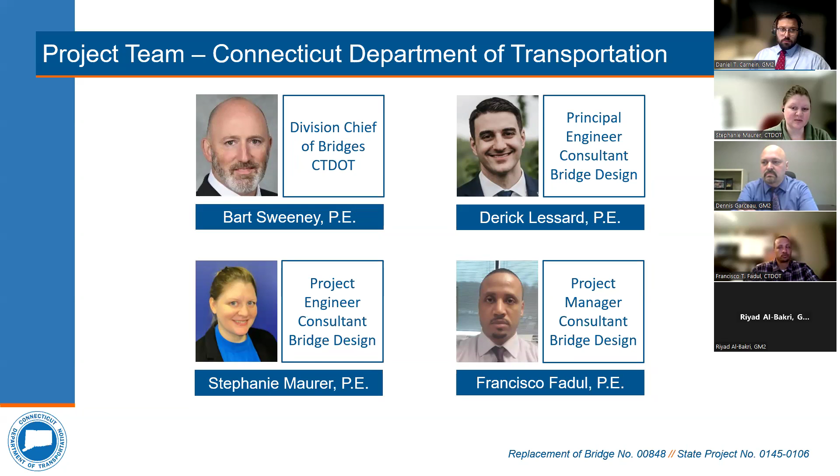All right, thank you, Stephanie. Again, my name is Dennis Garceau. I am the project manager and work for GM2 Associates, who is the Connecticut DOT's consultant liaison engineer. Tonight, as far as the agenda goes, I am going to first perform a formal presentation of the design process. Through that presentation, we'll explain the condition of the existing bridge and describe the project's purpose and need, present the proposed scope of work, and explain the anticipated project benefits and impacts of the project. And at the end of the presentation, we'll open the forum up to your comments and questions.

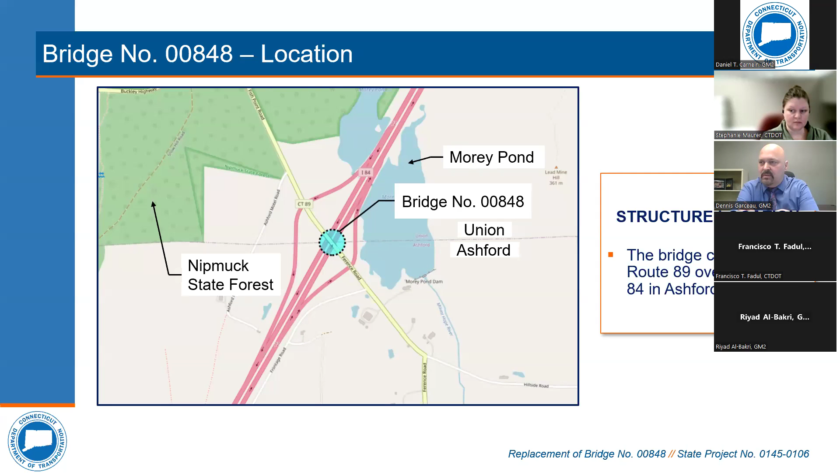This particular slide shows basically a location map showing bridge number 00848 at the center of this map, which carries Route 89 over Interstate 84 in both the towns of Ashford and Union. The bridge is actually sliced in half right at the town line, with Union to the north, Ashford to the south. A couple key features: Nipmuck State Forest is to the west of the project, and Morey Pond Road is in close proximity to the east limits of the project.

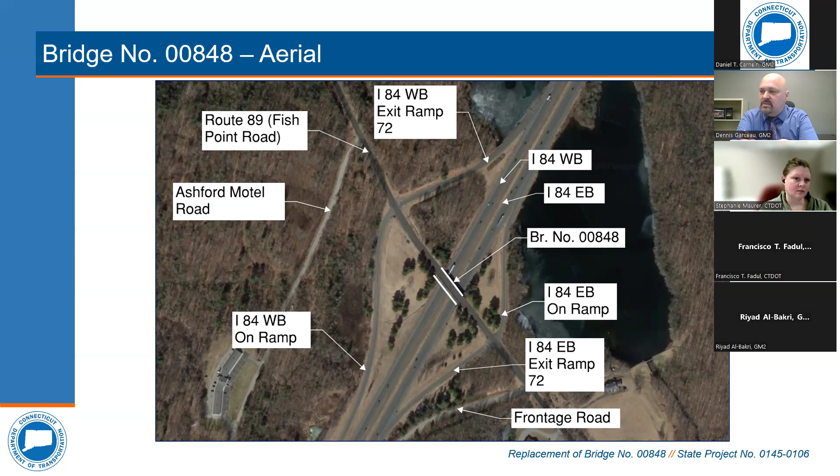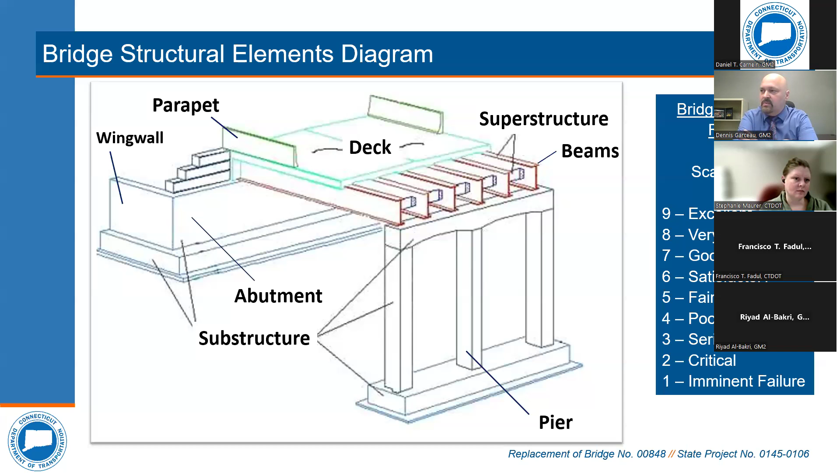A couple of things to note on the slide is that every 2 years, the Connecticut DOT does an inspection of this bridge and all other bridges throughout the state of Connecticut. And they basically prepare a bridge inspection report, which notes the different conditions of each of these components. And it's rated on a scale of 1 to 9, as shown on the right here, 1 as imminent failure, up to 9, which is an excellent condition.

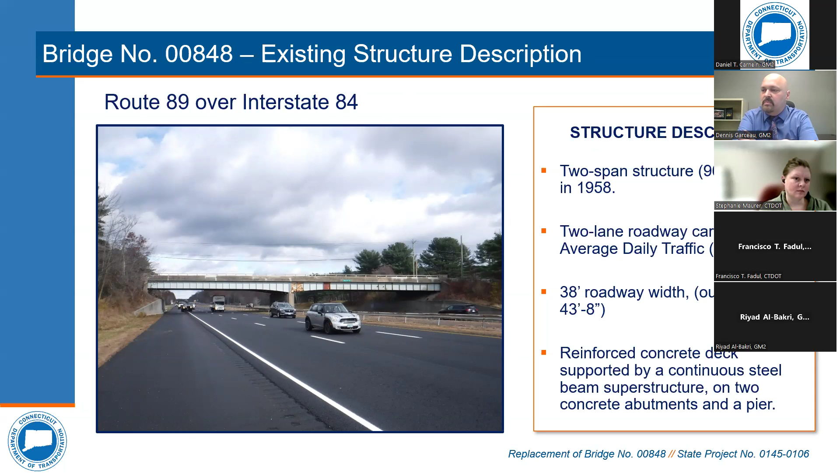Some of the things to talk about as far as the existing structure itself: again, it carries Route 89 over Interstate 84. It's a 2-span structure with 96-foot spans each. It was built originally in 1958. It carries 2 lanes of traffic with approximately 900 vehicles per day based on the year 2020 counts. The existing curb-to-curb bridge roadway width is 38 feet, and the out-to-out width is 43 feet 8 inches. The bridge is comprised of a reinforced concrete deck supported by a continuous steel beam superstructure, supported on 2 concrete abutments and a center pier.

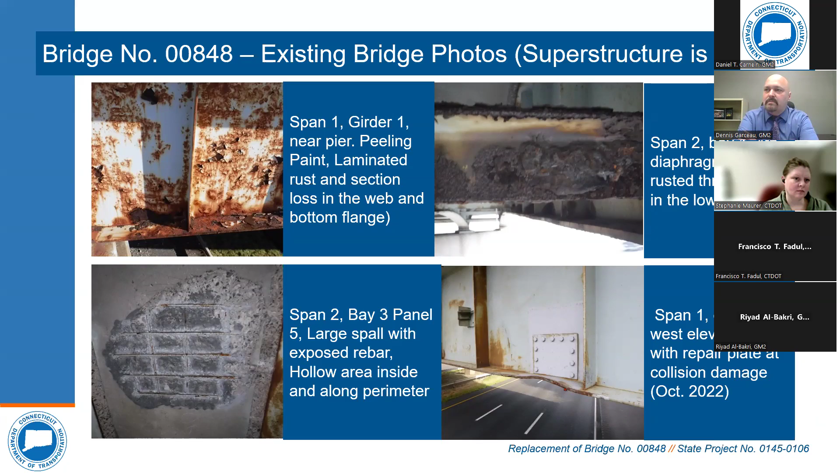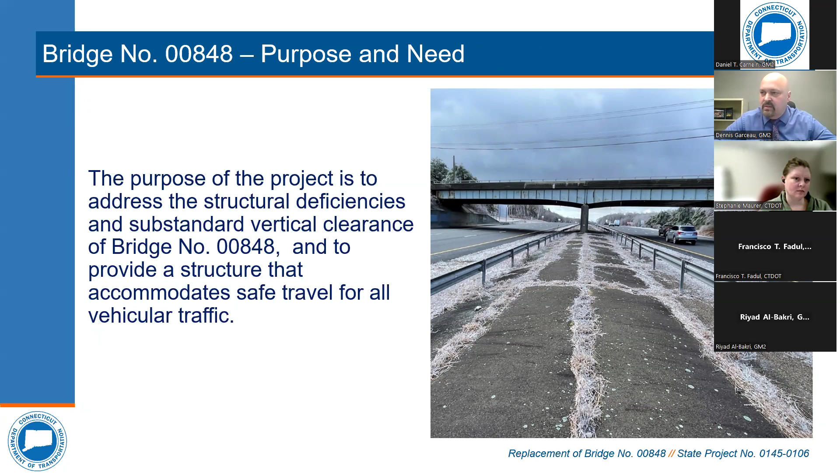The purpose and need of the project is to address the structural deficiencies noted on the previous slide, and also correct the substandard vertical clearance of bridge number 00848, and ultimately to provide a structure that accommodates safe travel for all vehicular traffic, both on and crossing under the bridge.

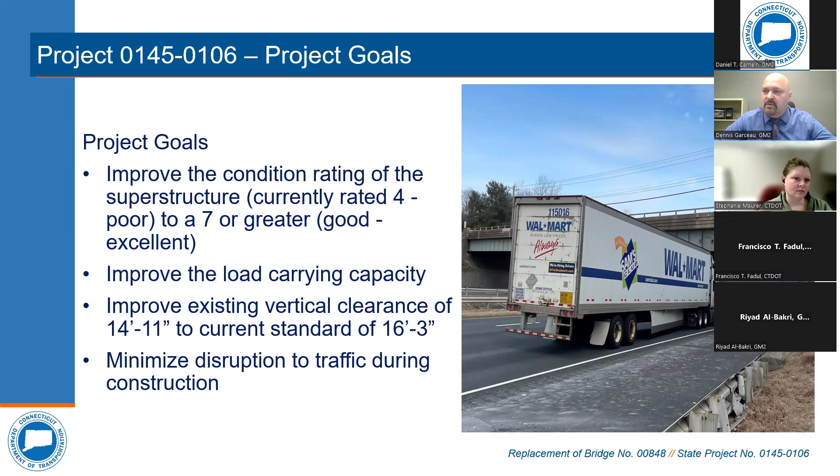Project goals are to improve the condition rating of the superstructure, currently rated a 4, which is poor, to a 7 or greater condition, which is good to excellent. We also want to improve the load carrying capacity of the bridge, and improve the existing vertical clearance of 14 foot 11 to current standards of 16 foot 3 inches. It's also important that during construction we minimize disruption to traffic.

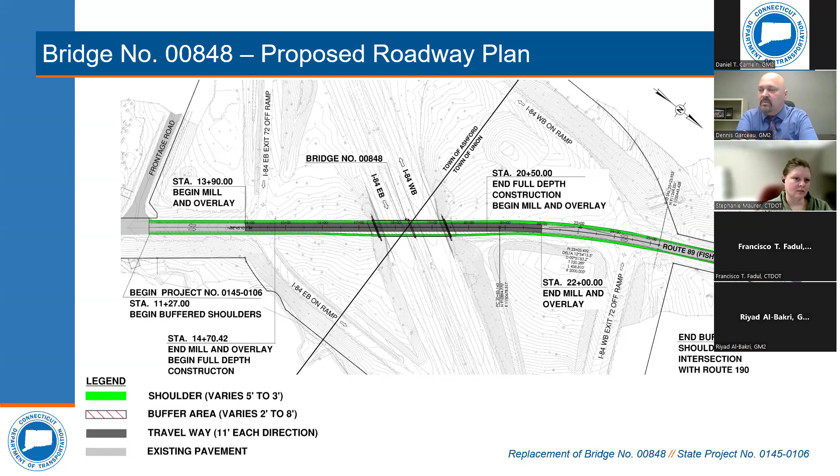The other thing incorporated in this project is the complete streets policy introduced by the department back in August of last year. The intent of that policy is to not only design projects for vehicular traffic, but also to safely accommodate both pedestrian and bicycle traffic. As part of this project, shown in green and in the red hatch areas, we're going to be providing buffered shoulders, which will begin just north of the frontage road on the southerly limit and extend through the project all the way to the intersection with Route 190 on the northerly limit. Next slide.

This slide is showing an aerial view of the overall limits of the new buffered shoulders that will be added, starting just north of Frontage Road, passing through the project area, and then further north past Ashford Motel Road all the way to the intersection of Route 190.

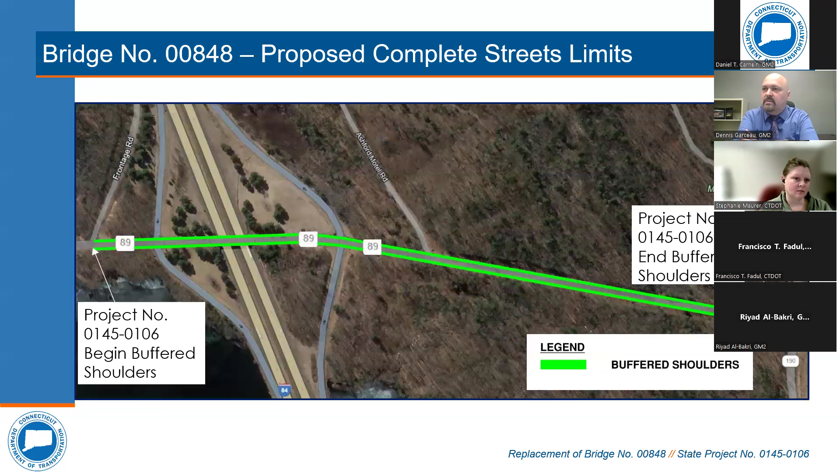This plan is showing a blow-up view of the actual bridge plan. We'll be providing two 11-foot travel lanes, shown in gray. There'll be buffered areas, which will be 2 feet at each approach. On the easterly side, it'll vary from 2 feet to 8 feet across the bridge, and on the westerly side it will be a constant 2-foot buffered area. What's shown in green is the shoulder area, which is approximately 5 feet.

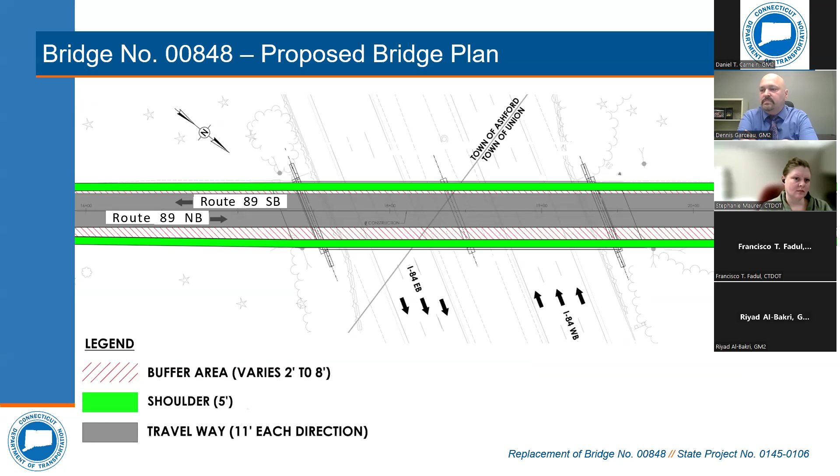This is showing a detail of what it would look like if you're standing down in the median looking west, with eastbound traffic on your left and westbound traffic on your right. The main thing to point out is that the minimum vertical clearance will meet the new standard, which is 16 foot 3 over the full width of both the eastbound and westbound of I-84.

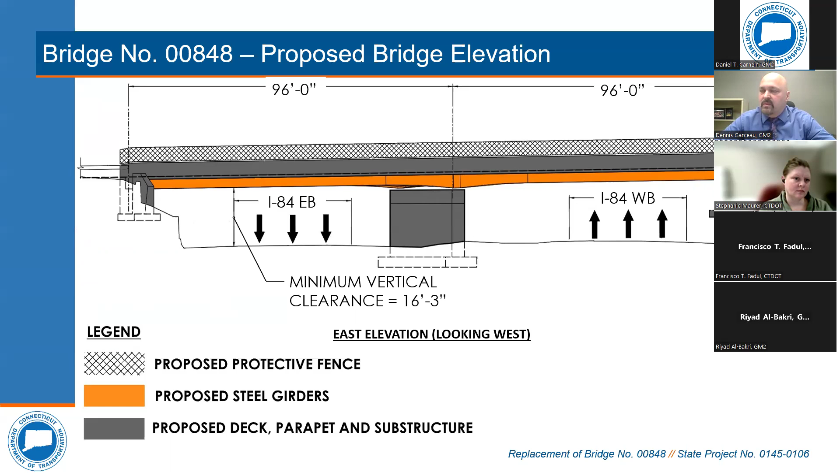Next slide. This is showing a slice through the superstructure, which is comprised of the steel beams and the concrete deck and parapets. The concrete deck and parapets are shown in dark gray, and the beams are shown in orange. The other thing to note is the proposed bituminous overlay, shown in the gray hatched area. Again, the proposed structure will accommodate two 11-foot travel lanes, a 7-foot buffered shoulder on the westerly side of the bridge, and a 13-foot wide buffered shoulder on the easterly side of the bridge.

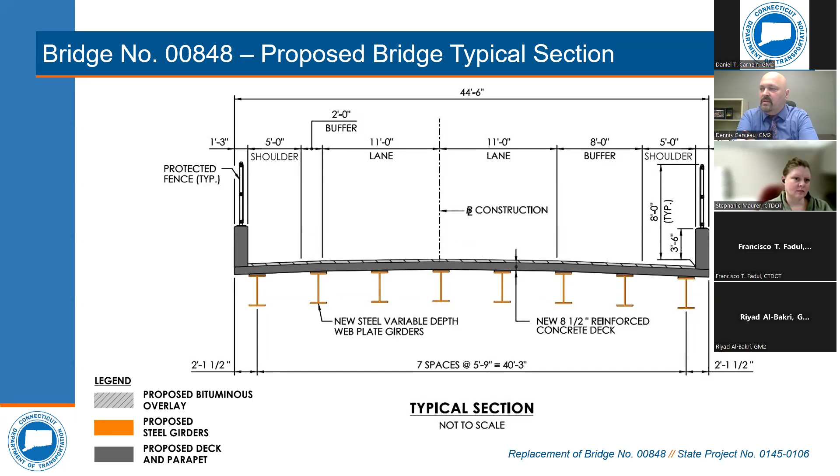During construction, the bridge will be constructed in 2 stages, and one lane of alternating traffic with signal controls will be maintained during construction. Essentially, during the first stage, the westerly half of the bridge will be removed, and then the westerly half of the new bridge will be constructed. Prior to doing that, the traffic will be shifted to maintain one lane of alternating traffic with signal controls on the easterly half of the existing bridge.

And this is basically showing what happens during the second stage. The traffic will then be shifted to the new westerly half that was built, and the contractor will then continue to remove the remaining half of the existing structure and build the second half of the new structure. And in the final condition, we basically get the full width of the new structure, which is 2 11-foot lanes, the 7-foot buffered shoulder on the westerly side, and the 13-foot buffered shoulder on the easterly side.

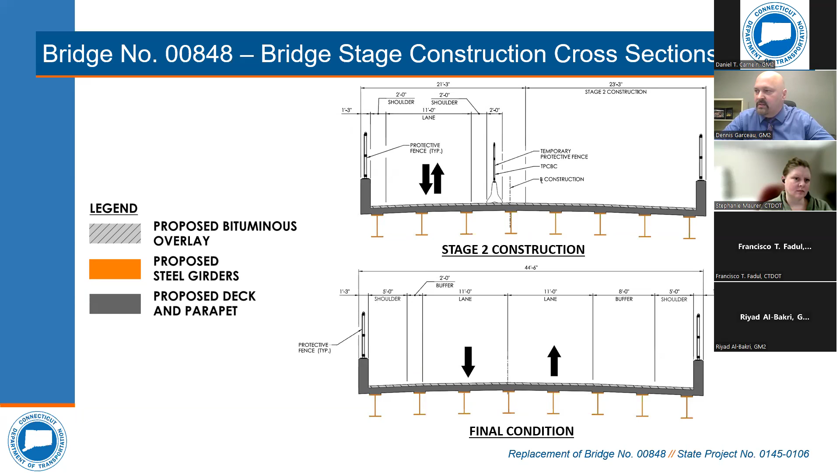Other thing to note is that during construction, there are some construction activities that will require both Route 89 and I-84 to be closed for short durations, which are typically scheduled to occur during the night when there's less traffic volume. To accommodate the traffic being closed on I-84, the traffic will be detoured to the exit and on ramps on both sides of the eastbound and the westbound accordingly, when the traffic needs to be closed for swinging, doing any overhead work with cranes, like the removal of the existing beams and the placement of the new beams.

Also, there'll be short-term closures for Route 89. For traffic that's on the south side of the closed bridge and wants to get to the north side, they will have to be detoured utilizing the on-ramp for I-84 eastbound, heading eastbound, getting off at the ramp at exit 73, crossing over the Connecticut 190 overpass, and then getting back on to I-84 westbound, getting off the exit 72 ramp, and then you're able to head north. That's approximately a detour length of 3 miles.

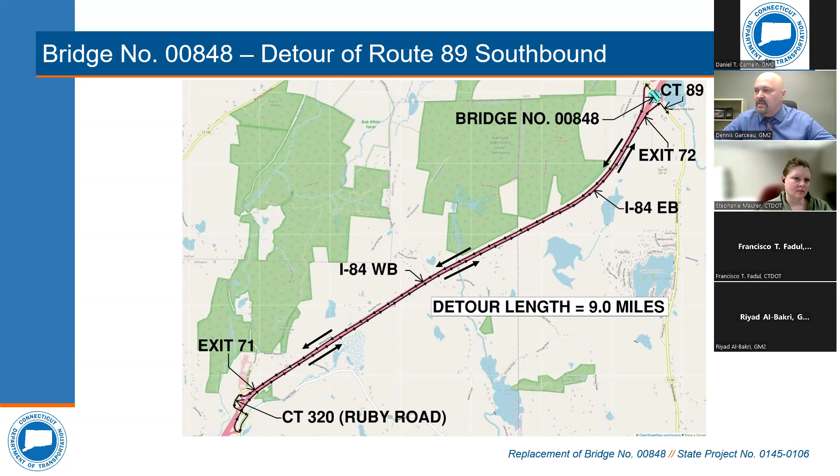Other additional project information: during construction, there'll be temporary relocation of overhead utilities required. As far as right-of-way is concerned, all the proposed work will be done within the state right-of-way, so there'll be no temporary or permanent property impacts. For environmental, all the work will be done in a non-regulated area, so no wetlands or watercourses will be impacted. However, a Connecticut DEEP general permit for the discharge of stormwater and dewatering wastewaters from construction activities, otherwise known as a construction stormwater general permit, will be required.

As far as the schedule and cost, we're anticipating construction to start in August of 2025. It will last 2 construction seasons and is anticipated to end in August of 2027. The anticipated construction cost is approximately 13.5 million. This project is 80% federally funded and 20% state funded, and there will be no cost to the towns.

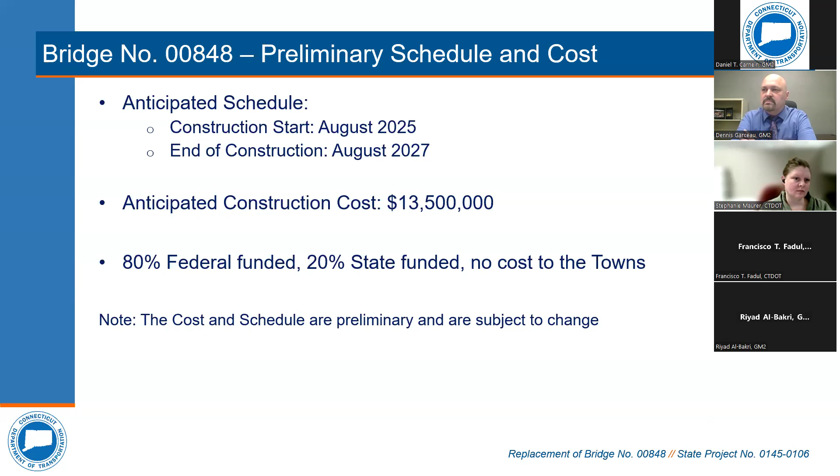And now I'll open it up. Dan Cardian will be presenting this next slide, and will also lead the question and answer session. Thank you. Thank you, Dennis. As Dennis mentioned, I'll be assisting with tonight's live Q&A session.

If there are any questions or comments regarding tonight's presentation that you have after tonight's live Q&A session, they can be submitted through the project email address or the phone line through Wednesday, March 27th, 2024. Again, with any voicemails, please include the project number 145-106 and your contact information so we can get back to you with any information.

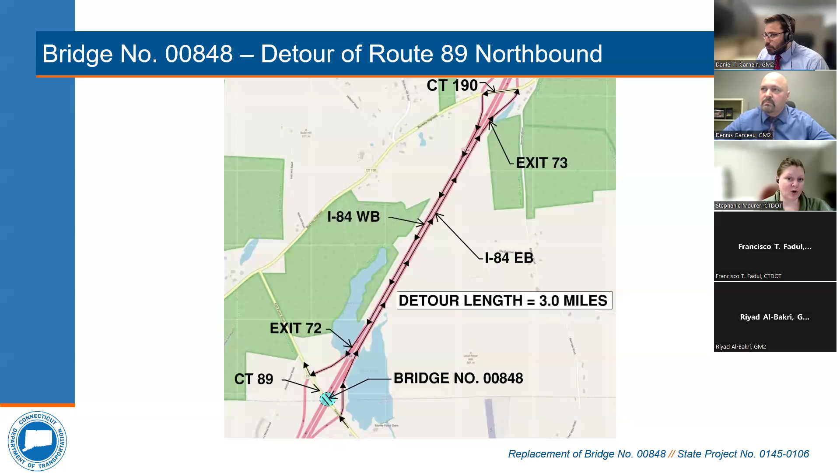So, Catherine, each construction project does have to get a permit for the discharge of water during construction. And within that permit, there are basically regulations that the contractor has to meet and will be held to. So there will be somebody out there making sure that he is keeping to all of those discharge regulations.

And I can actually add to that, Stephanie, if you don't mind. Yeah, the other thing to keep in mind is that the bid documents will incorporate any provisions to make sure that the contractor is avoiding any impacts to the watershed and so forth. So there'll be provisions in place. All right. Thank you, Stephanie and Dennis.

The next question we have from Richard. My interest is to go to Sturbridge from Route 89 frequently. So I think, Dennis, could you speak more towards the access to I-84 north or I-84 eastbound? Eastbound, yeah.

Yes, I can answer that. Yeah, essentially, again, you'll have access to those ramps. You'll still be able to access I-84 eastbound via 89 to get to Sturbridge heading east, further east. If that answers the question. Okay. Thank you, Dennis.

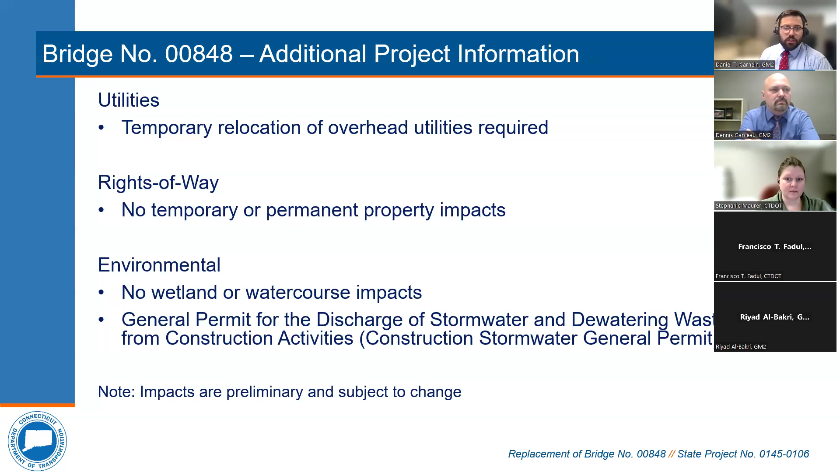We have another question regarding the water. Will they be testing the water? Stephanie, did you want to start with this one? I'm not positive what you mean by what would they be testing for. I'm assuming that you would be referring to sediment. And the answer to that is no. Well, maybe Dennis or somebody else can answer that a little bit better. But as far as testing for particles within the water, I mean, it would be visual, right? They would go out and

Oh, I'm sorry, I'm continuing to look at another question that came in referring to the water in the watershed. Okay, that's a clarification, yeah. Thank you. I can try to add some more to that answer. Essentially, as mentioned before, there'll be a permit that's required to go through Connecticut DEEP. So during that process, all the proper protocols, and if testing is required and what type of testing, will be built into the contract documents and will be performed.

Specifically, if they test the water, I'm not an expert on that particular area, but through the permitting process and through the development of the contract drawings before the contractor gets out there, there'll be protocols that are necessary to protect that watershed, whatever that takes. All right. Thank you, Dennis and Stephanie.